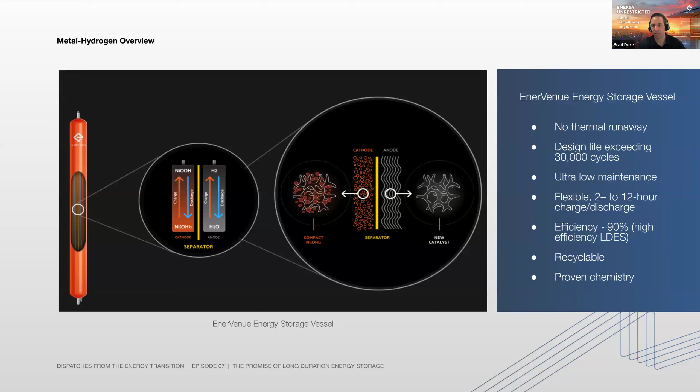Thanks, Brad. I'm going to kind of pivot to Jakir on the same question. My background prior to energy was economic development and financing. So with a tool like Storlytics, what role does economic modeling have, particularly from understanding the financing and underwriting? Do you see that being a really big aspect for LDES applications?

Yeah, I really think one of the key enablers for LDES is going to be financing for these projects, right? And to get financing, you basically need market access and then long-term visibility. And you have to create those markets, and that's going to really come from the integrated resource planning that different utilities do. So these LDES technologies need to be part of their planning upfront, right?

So now, yeah, 4 hours is where the market is at for energy storage, but you need to add 8 hours, 10 hours plus, even 100 hours, that kind of technology to your resource mix, so that when you're doing the planning, depending on your grid conditions, you have the options to choose from these technologies. And that's really going to open up the market for these technologies, where now there is going to be an incentive to build them because there is a need for these things.

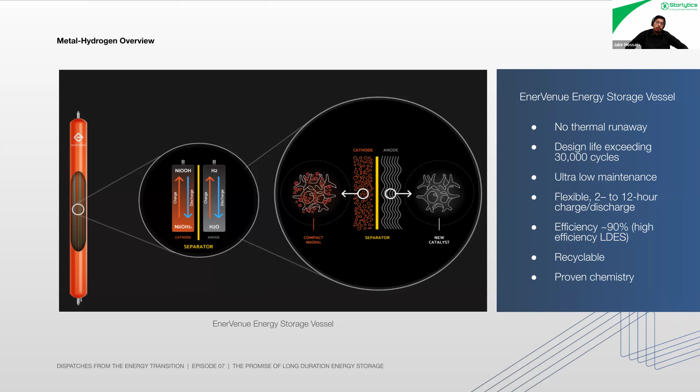Yeah, I think that's a great transition, Jakir, to what we wanted to really spend some time on here: some applications for long duration storage. We've got 3 total, 1 starting here on the utility scale, and then 2 more for commercial industrial applications. But I'll give the floor to you, Jakir. It was really exciting to learn about this gap that you guys have found and how you started to address it. If you want to walk us through what's on the slide here.

Yeah, sure. So to piggyback on what I mentioned earlier, there is this gap: you need to have these resource mixes of long duration storage of different durations to be able to select them as part of your integrated resource plan.

So what is integrated resource planning? A little bit of background, right? Most utilities look at 5, 10, 15 years in the horizon and try to see how they can meet their load growth and other requirements. And they have different types of resources to choose from: natural gas, nuclear, solar, wind, energy storage, and all that.

When it comes to energy storage, most of the time it's defined around what is economically viable today: lithium, 4-hour, 1 cycle per day, 85 to 88% round trip efficiency. That's what gets defined. So when you're running these models, by default it is only looking for areas where you need a 4-hour solution, and then trying to pick how much energy storage you will need. That's really not optimal because you are not including LDES as part of your planning, so obviously that's not coming out as part of your resource plan.

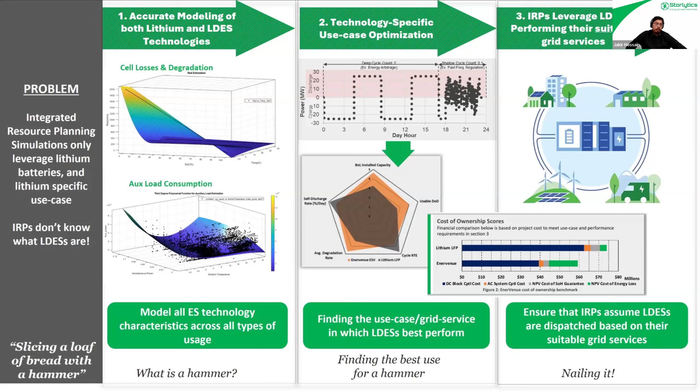Great. And speaking of seeing what these technologies can do, let's take a look at, we've got two more examples here. Brad, I'll turn it to you here to walk us through this first one, looking at data centers.

Sure. So I think everybody's, we've been hearing about data centers so frequently in the media now. I mean, raise your hand if you haven't read an article about the energy demands of data centers in the last 2 or 3 days, right? We know that between the data center boom and the energy demand that's being driven by AI technologies, that this is a spot that's ripe for energy storage.

And the next generation data center doesn't necessarily look like the data center of old. This isn't a pure resiliency play anymore. It's not just backup. Certainly that's important, but they're looking to reduce demand charges. They're looking to lower costs, to integrate renewable energy. Sometimes that storage or that on-site energy is the key to being able to site a data center application. So there's a lot of new things around data centers that we're seeing that's really exciting for the renewable energy and the storage industry.

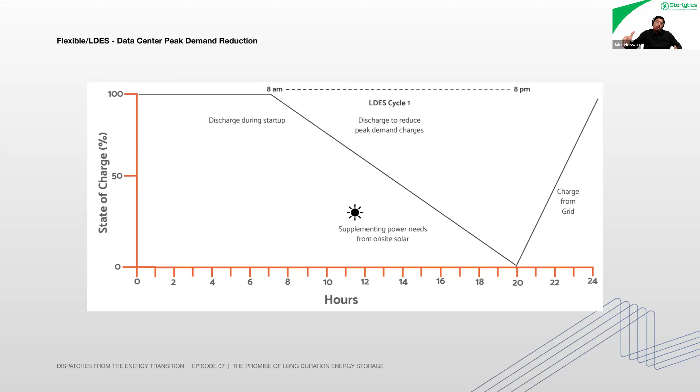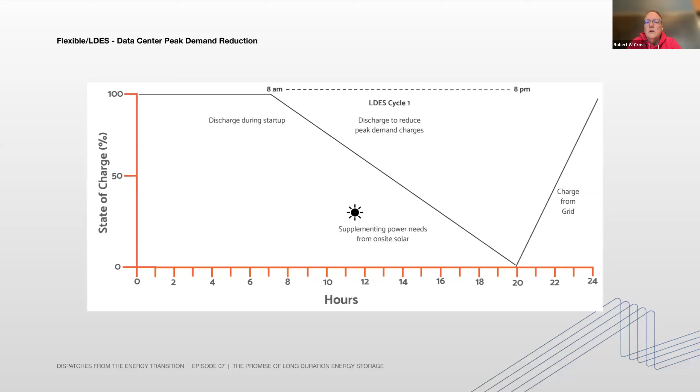Yeah, so I'd definitely say we're in the market. We've shipped Gen 1 and Gen 2 product, but I should also say that we've been capacity constrained and we are selective with our customer engagement. So we've really been smart about how we're going to market and the technology that we're using, and we're learning in each one of those revisions and implementing additional changes. For example, we learned a lot with our BMS moving from our Gen 1 to Gen 2.

Now, again, making the decision to move to Gen 4 and skip a product generation delayed our scale plans a bit. But ultimately, we're ending up with an energy storage vessel with more power, more energy, greater energy density, and a better overall offering to the end user. So that Gen 4, as mentioned earlier, we're proving out the manufacturability of that line right now. And once that's complete, we'll be looking at producing at scale.

And so we are actively engaged with key customers and selective customers on their pipelines and projects. And those discussions, we've been having those for quite some time now. So hopefully that answers the question. Yeah.

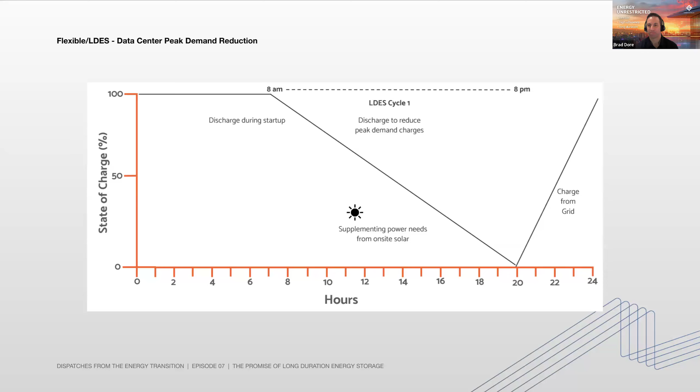We're getting close to the top of the hour here. We do have one more application for you to walk us through here, Brad. Now we're looking not at data centers per se, but more so industrial microgrids. So larger commercial scale facilities that may or may not be connected to the larger grid.

Yeah. So when we're talking about commercial and industrial, one of the things that we're seeing is a large uptick in interest from traditional oil and gas players that are looking to decarbonize their operations. If you look at just the oil and gas market, it accounts for 9% of all global CO2 emissions on its own. Mining is responsible for a huge percentage of the world's annual electrical consumption. So the mining and the industrial sector have got strong carbon reduction goals and requirements to install renewable energy, and certainly storage is a way that can be done.

They're one of the folks out there that really understands the long-term asset value that an energy vessel that can do 30,000 cycles can bring. They understand what it's like to have those maintenance requirements, how important those can be. And so we're really interested in engaging with these folks. We've had a lot of interest on the mining and industrial and commercial side, because there's so much need for it.

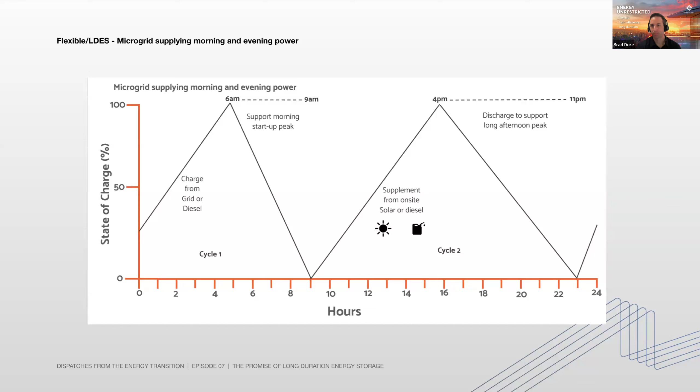Great, thank you, Brad. Yeah, I personally really like seeing the state of charge. The discharge charts here are really helpful, I think, to visualize the major differences in just these two applications we've seen, but you could easily imagine one where maybe you're discharging 4 times a day. It's no longer cycling once or twice, but many, many times, even for shorter spurts. Really opens a lot of doors up for potential projects.

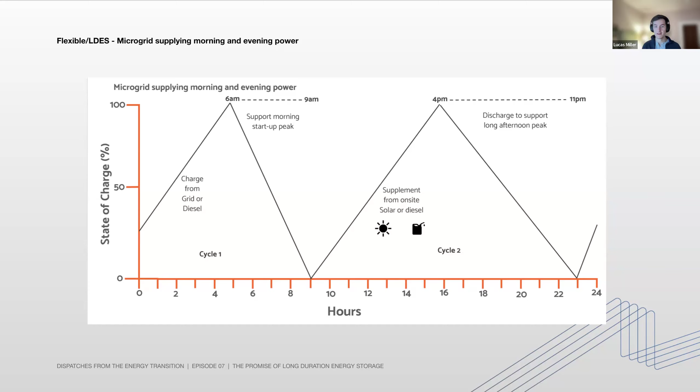To break down what we've looked at, first, we want to encourage you to look beyond traditional lithium-ion energy storage options, particularly at that IRP stage that Jakir walked us through. We have more options available to us today than just lithium-ion, specifically just LFP. It's important that we start to bake that into our modeling and procurement.

Along those same lines, this long duration energy storage category is really an umbrella term that includes a ton of sub-chemistries and technologies underneath it. So all the way from pumped hydro, where you're moving water from a low reservoir up to a reservoir on a hill, and now gravity is bringing it back down and turning a turbine, to the metal hydrogen technologies we've looked at today, and even flow batteries. So if you hear long duration, don't attach it to one particular type of energy storage. There's really many that could fall into that category.

And then thirdly, modeling degradation that is specific to your use case. So we just looked at 2 different discharge charts. You can imagine that those batteries may degrade at different rates, and whether you're cycling once a day, twice a day, 4 times a day, that may impact what your battery looks like 10 or 20 years down the line. So it's important to bake in what specifically you're going to be using your battery for into your models, and then include degradation in those.